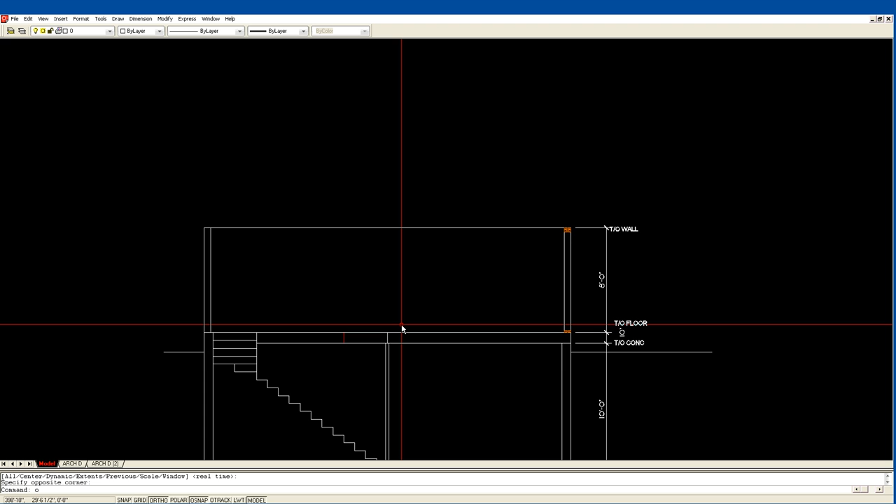We're just going to show a symbol for a beam, so if I offset something like 3 inches from the center again, and then offset something like 12 inches, I might be using 2x12s, or I might be using a 12-inch microlam beam, or I might be using less. We'll figure that out later.

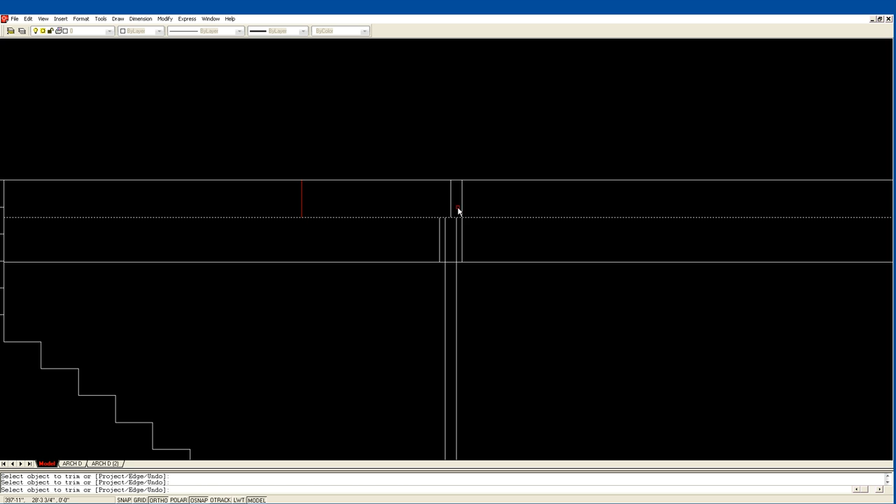Okay, and then I trim so that, and then I can show a symbol for a beam. So we can trim this. So there's a steel post with a beam running all the way 58 feet down the middle of the building, with joists coming from either side. That's how we're pretty much going to do that.

Now, this also could be a wall down here. We could pour another footing like this, down the middle of the wall and put an actual studded wall to support the center. And it depends on what he wants for his basement. That's a much cheaper way of doing it than buying teleposts and a heavy-duty beam like that.

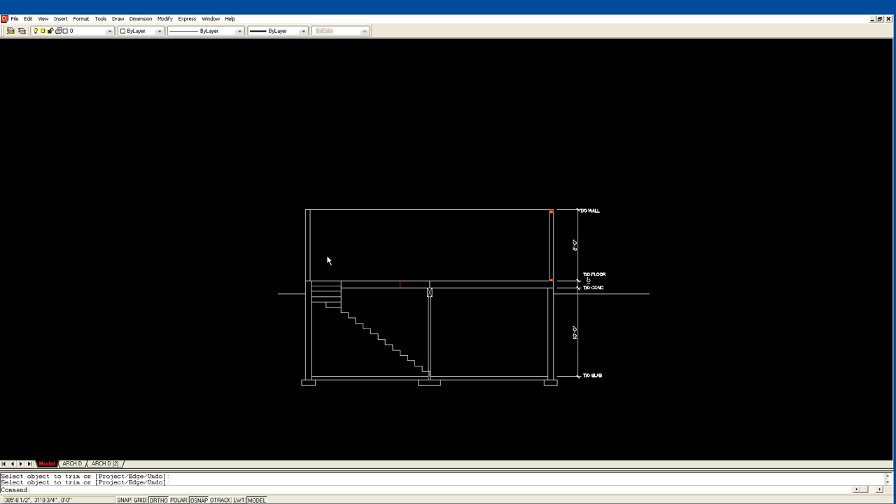Okay, the roof. Part of this building, if we go back to our floor plan here, this back half with the master bedroom and so on will be a flat ceiling, and the roof will be done pre-engineered, pre-made, delivered on a truck, trusses. We'll show something like that.

Whereas the front of this building, where he's got the view and the picture windows in the front and the rake windows in the front, will have a sloped ceiling, and so will be built out of rafters. Just to give you an idea, again, this is not a complete cross section. We'll design a roof with trusses. We've already established with the client that our pitch is 5/12.

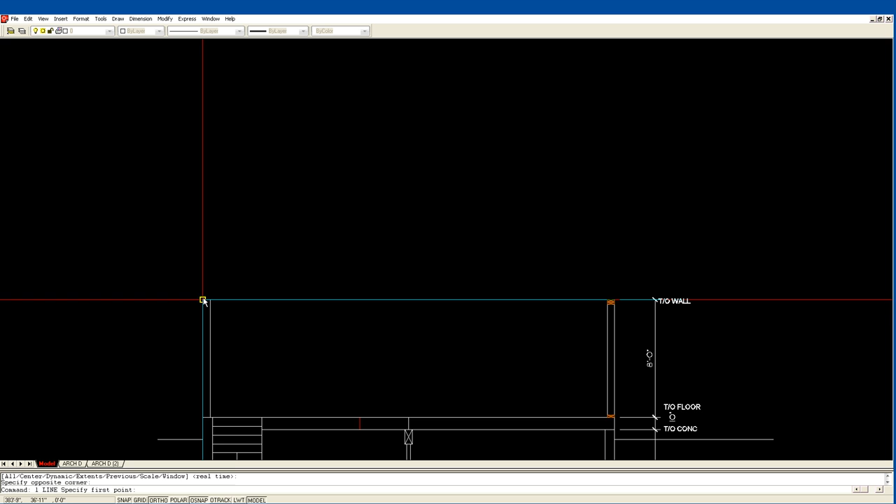Okay, no matter if you're using metric or imperial feet and inches, this roof rises 5 units for every 12 units in the X direction, horizontally. So I'm going to start with a line, pick the outside of this wall, and tell AutoCAD to go from that point at 12 in the X direction, comma, 5 in the Y direction. So there is a line at a 5-12 pitch.

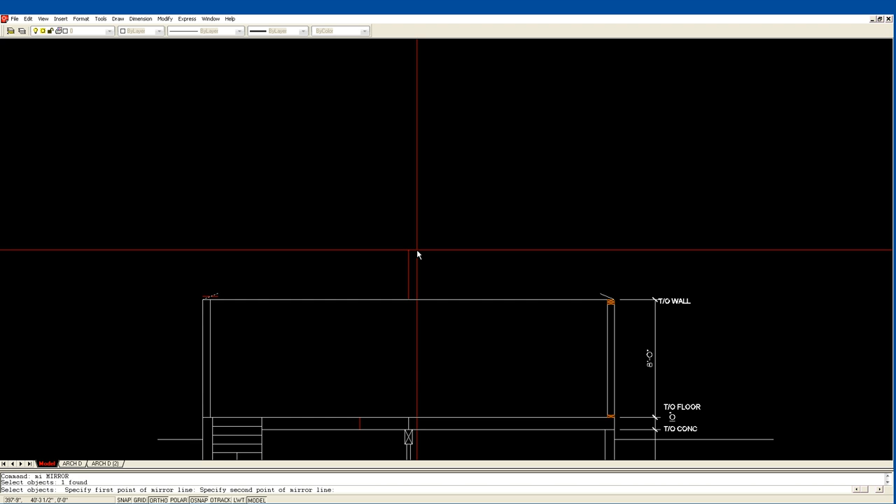I'm going to mirror this line to the other side of my building, and then fillet the two of them. So there's my roof.

At the back of the house, over the master bedroom, this ceiling will be flat, and at the front of the house, in the living room, the ceiling will match this 5-12 pitch. In order to do that, I have to use rafters, which are the same as floor joists, only at an angle.

Because I have to insulate this and leave an airspace, I need at least 14 inches of depth. So for this particular job I'm going to use the same material as I used for the floor - I trusses - and they're going to be 14 inches, so offset 14.

Actually, let's undo that and offset 14 in the other direction. Underneath that point, right at the center here, I'll need a beam and a post, just like I have here. It won't be a metal beam, it'll probably be a bunch of 2x6s nailed together, and it will sit right on top of this beam, supported all the way down through the basement.

Into this footing. So if I drew a line at center and offset 3 inches on either side to make a 6-inch post, and then I take a line from here and offset 12 again, not knowing what size this beam will be until we do the structural.

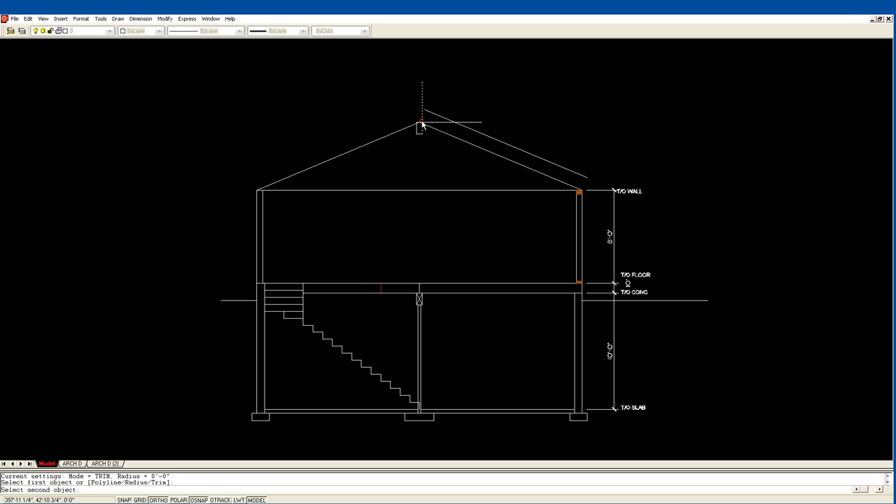Don't like that - fillet this one. Okay, so offset 14. I picked the wrong one and lost it. You see how that's going to work - I have a beam with a post underneath it, right on top of this beam, right on top of that post, right on top of that footing.

Now the other end, the master bedroom end, will be built out of trusses, and they are prefab. So I can get rid of this line. Typically a truss will be - I'm going to get rid of this post and stuff too, we don't need it for a truss.

It will look exactly like you see. It'll come on a truck looking exactly like this. It'll be 28 feet wide, built out of 2x4s in most cases. It's engineered at the manufacturer, so they designate what it's built out of.

Typically, when we're drawing a symbol for it, the first thing we have to do is leave about 5.5 inches at the heel of the trusses. So offset 5.5, and that's where the bottom of this truss will be.

So I'm just going to move this line to there. Typically it's going to be built out of 2x4s, so I'm going to offset 4 inches. I am going to use a 2-foot overhang on this building.

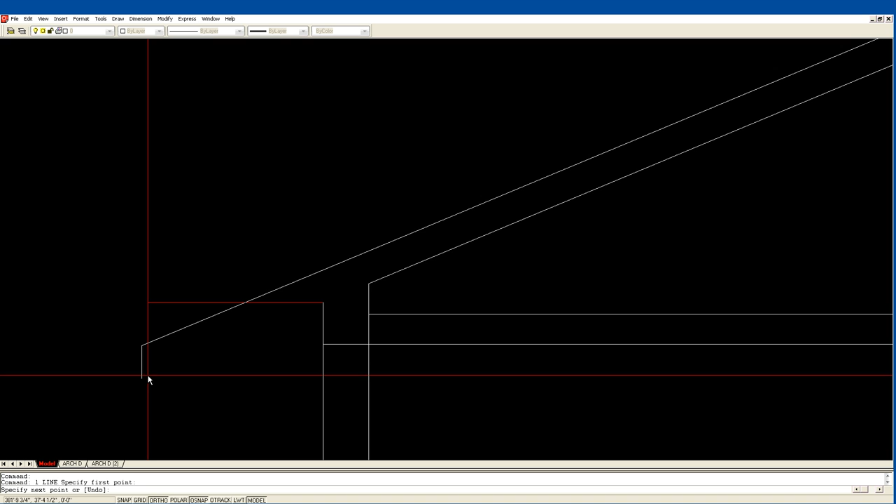We can trim, and we'll get rid of that, and that - oh, let's just put that one back. Trim this up. So that would be done at a manufacturer.

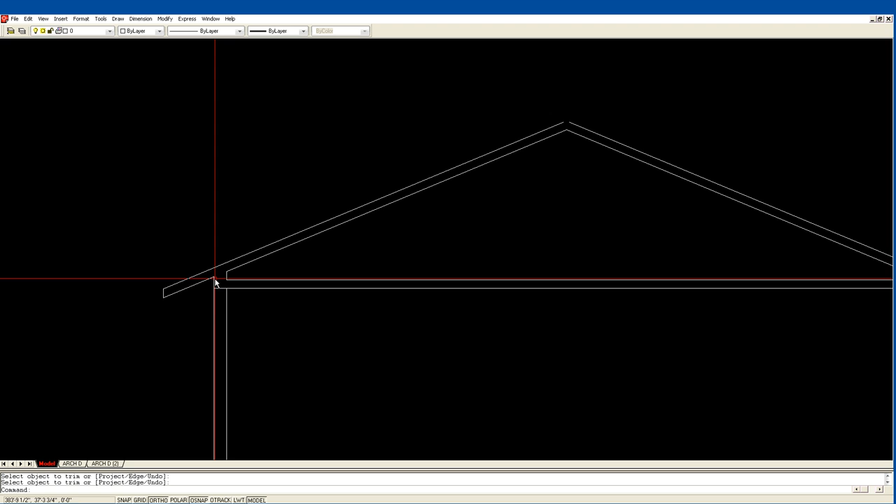That would be a 2x4, 2x4, whatever they use inside. It would be put together with gang plates - they're strips of metal with knockouts in them, and they're rolled onto these joints, and they make it very tight and very strong.

And we finish this up. Now there would be a chord in the middle, probably a chord in the middle here, and then another chord like that. So this whole truss system would be built out of 2x4s, and it would be designed to hold however much snow sits on top for whatever area you're in. So there's a snow load for every area, and these trusses will be engineered for that snow load.

So as we're designing this house, we just show the fact that they are trusses. We don't actually design the truss - that's the manufacturer will do that. Okay, that's about the roof. That's about as far as we need to go on the cross section.

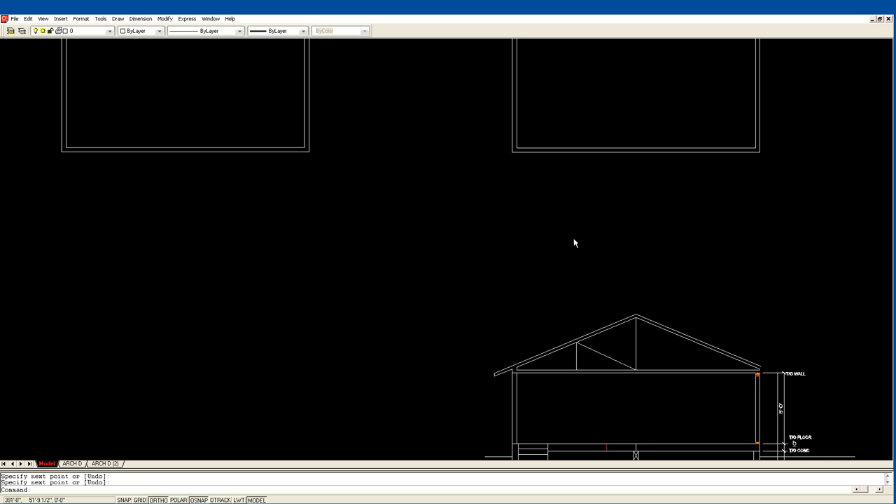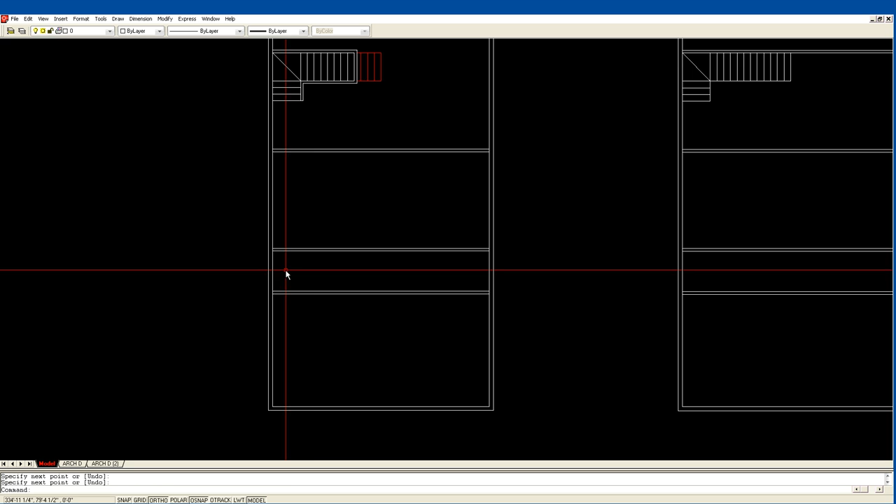Let's go back to designing the plan view here. I'm going to start in the bathroom, and if you look at the drawing that my client gave us, the sketch, he has a bathtub along this wall, a toilet beside it, and then a vanity. So we're going to bring those in.

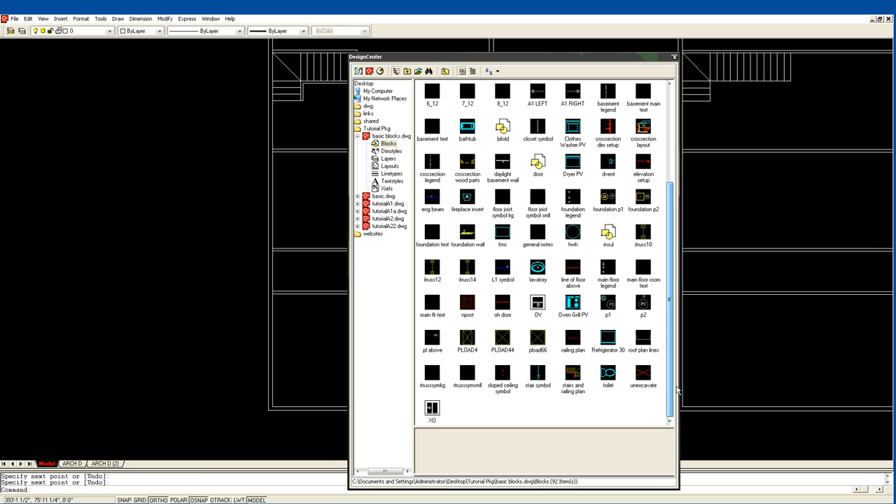Using AutoCAD Design Center with the basic blocks drawing I've given you, I double-clicked on blocks to get to the blocks within that drawing. I need a bathtub. Oh, there's a toilet, we need one of those. We need a sink, and we need an ordinary bathtub, a 5-foot bathtub.

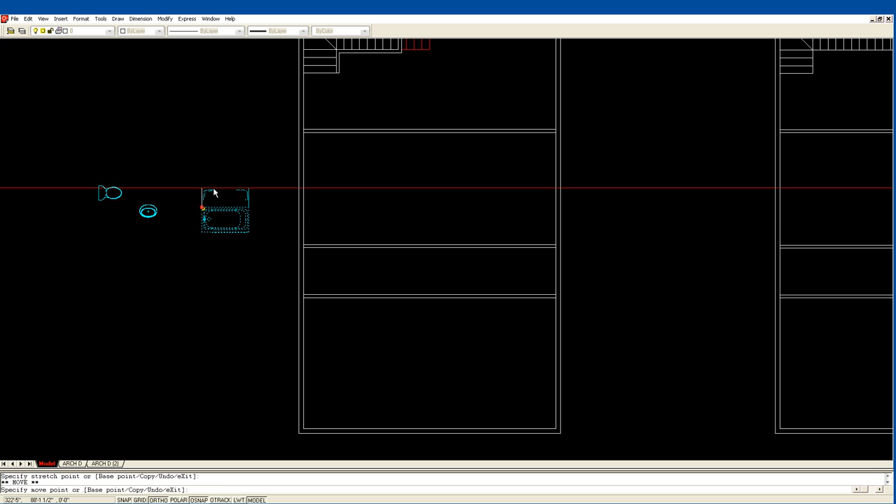I'm going to put Design Center away. So these came in as blocks. I'm working on layer 0, so in order for these blocks to go back onto the layer they're supposed to be on, I'd have to explode them. But I don't want to right now because they're easier to move as blocks. They only have the one node. I make that node live, double click twice to get into rotate, and move it in the direction I want, which is right there. Grab it and put it right there.

Okay, that's simple. Fits right into a 5-foot space.

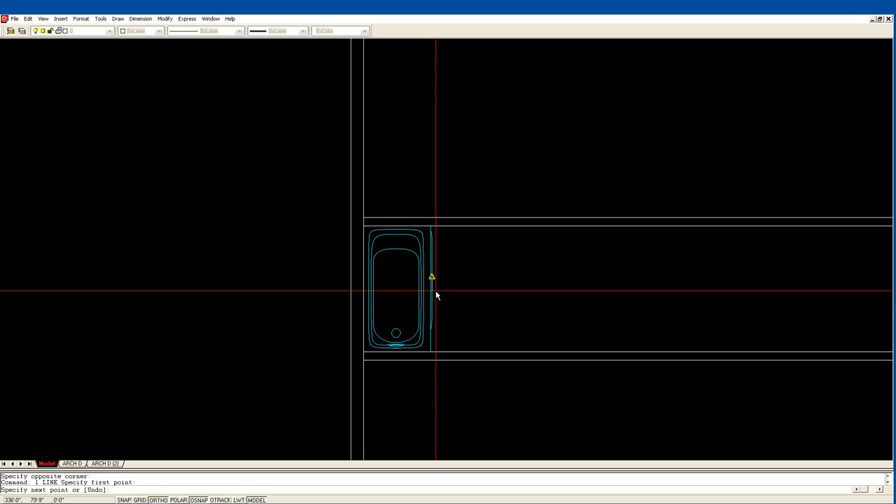I need to designate space for the toilet, and typically that would be 3 feet, okay, is what I want for a toilet. If I take a line somewhere from the center of that up, and offset 3 feet, extend it down, this is going to be the space I'm allotting for the toilet. I'm going to rotate the toilet, move the toilet, F8's off, anywhere within that space.

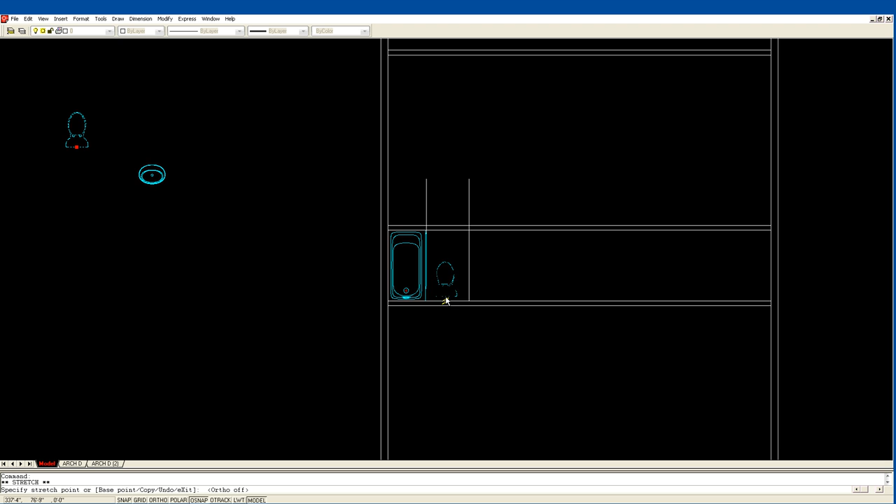I'm not building it to exact size. It really depends on what tub they buy, how wide that tub is. I've left lots of room here. No matter what tub they buy, it should fit in there nicely.

I now have to put a vanity in and then put the sink in the vanity. I'm just going to rotate the sink around, punch in 180. So we've turned it around 180 degrees. I'm going to make it live and just bring it in closer to where I want to work here.

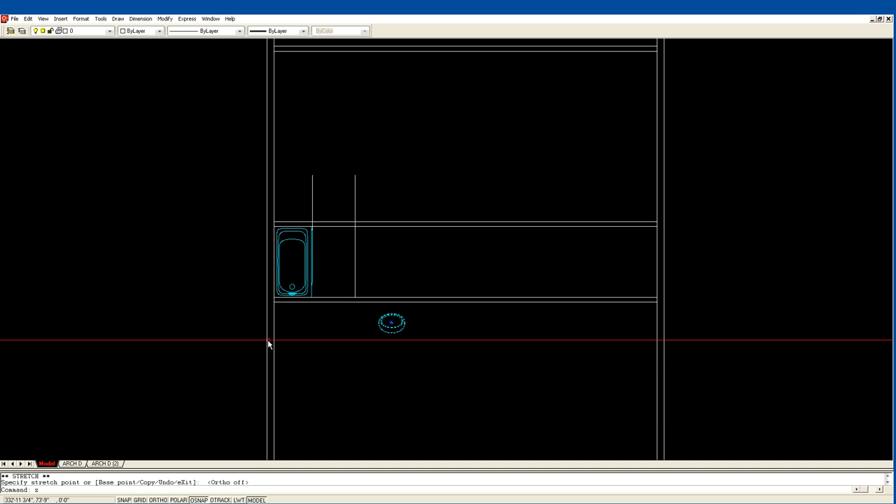What happened to my toilet? Oh man, everything went, I'm just going to undo. No, I'm going to rotate it around 180 - I guess it was live when I did the sink. I'm going to put it in here somewhere, and then zoom in and move it.

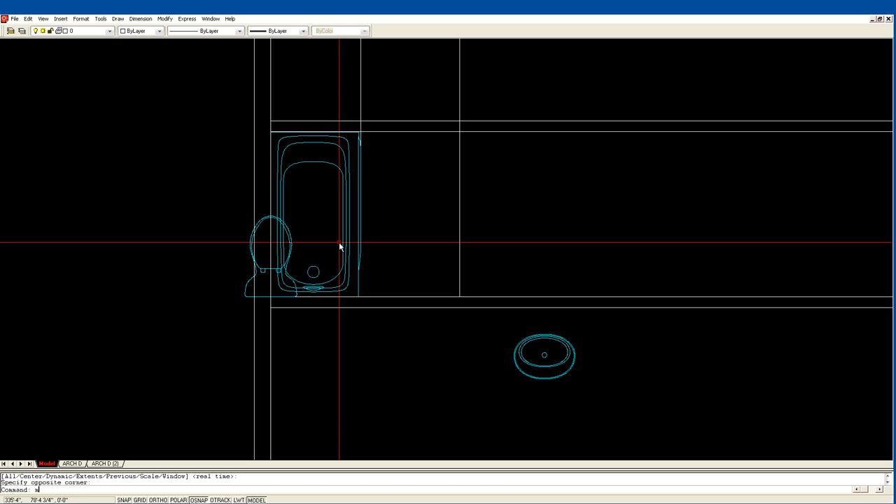I figure that vanity, a nice length for a single vanity, is about 4 feet. They're all over the place, so they're inexpensive to buy, and typically it's 22 inches deep. So I'm going to offset 4 feet, and offset 22 inches. And then I'm going to move my sink in there.

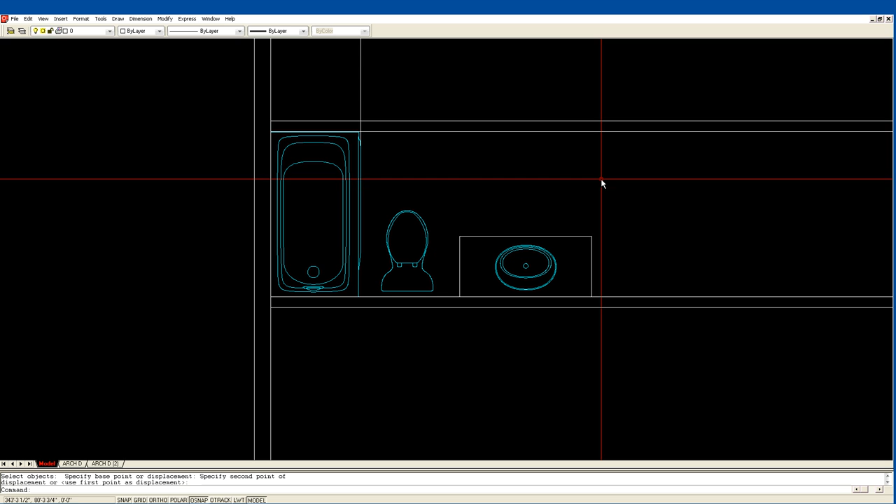So that's the layout of the bathroom. We can get rid of this construction line. I've left 3 feet, put a normal bathtub in 5 feet. I'm going to extend this to here, and then offset 4 inches. That's going to be the outside wall of my bathroom. I'm going to fillet it.

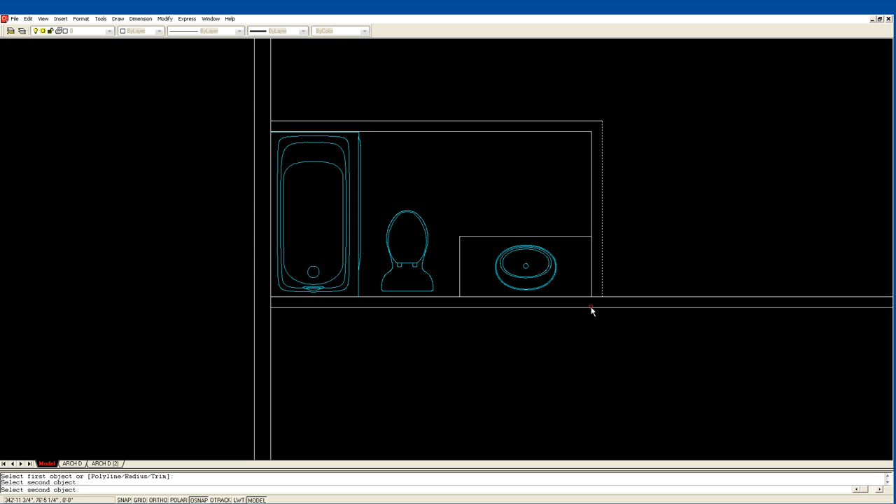I need to put a door in this bathroom, so I'm going to use the door lisp routine that we've put in Appload. You get into it by typing in door. The first thing it's asking is for an offset point, so I'm just going to pick the inside. I picked that inside corner because this lisp routine wants you to pick in the direction of the swing, and I want to swing this door in against that other wall, so I picked the inside of the wall.

It's asking me for an offset point, and I'm going to accept 4 inches, which is the minimum that a framer needs to put in a door. He needs double studs on either side of that door, plus the door opening needs to be 2 inches bigger than the actual size of the door, so 4 inches is 2 studs, 3 plus an inch. That works perfectly, so I'll accept 4.

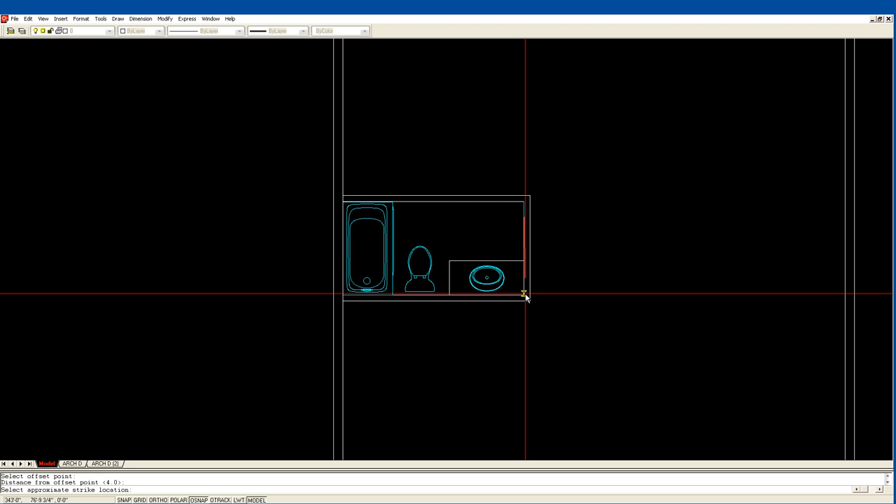Approximate strike location - well, where does that door end? It's approximately here. Now if I were to pull it way out to here, I would end up with a double door, this lisp routine would just draw a double door. So again I'm going to pick somewhere around here. It's asking me for the opposite direction, the opposite face or wall, so I'll pick that. It's asking for the size of the door - well, a typical door for a bedroom bathroom would be 30 inches. 30, enter. There's my door.

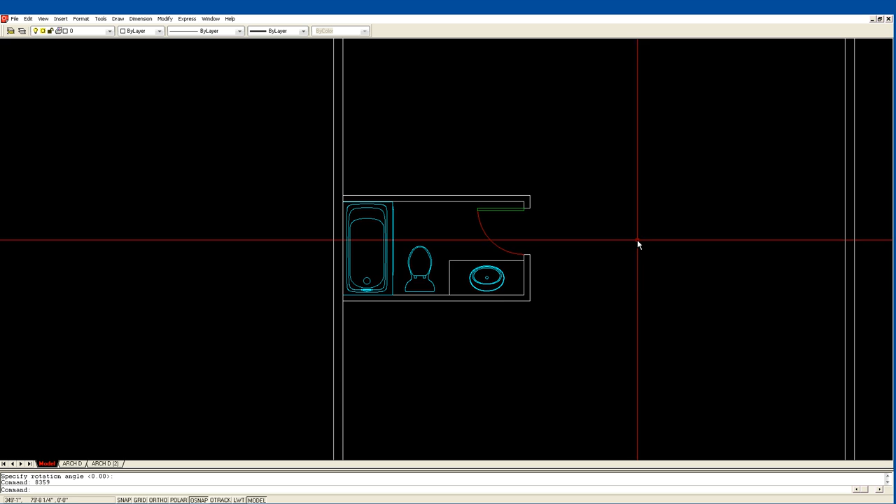Okay. We need a glass of water is what we need.

Hallway. We made his stairs 42 inches wide, so we'll make his hallway 42 inches wide. So offset 42, offset 4, there's the hallway.

These lines extend. Trim.

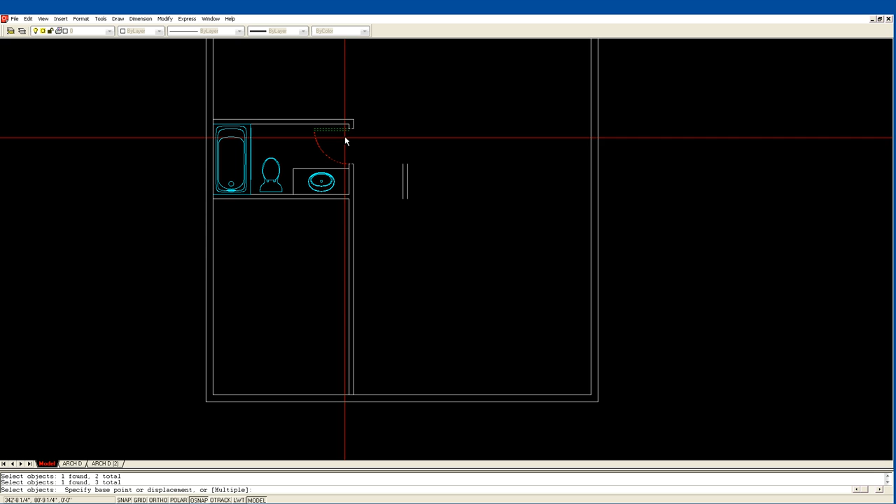Okay, we need to put another door in. We're just going to steal this one. So we're going to copy that plus that from right in that corner, and we're going to put it right in that corner. Then we're going to trim that and that. Okay.

Offset 4 inches for that minimum framing. Okay, that's where we can start this return wall over to the outside. So extend. Okay, then we're going to offset 4 inches, and then we're going to trim everything up. Okay. That pretty much looks like his drawing. We're going to extend this hallway right to here and trim it up.

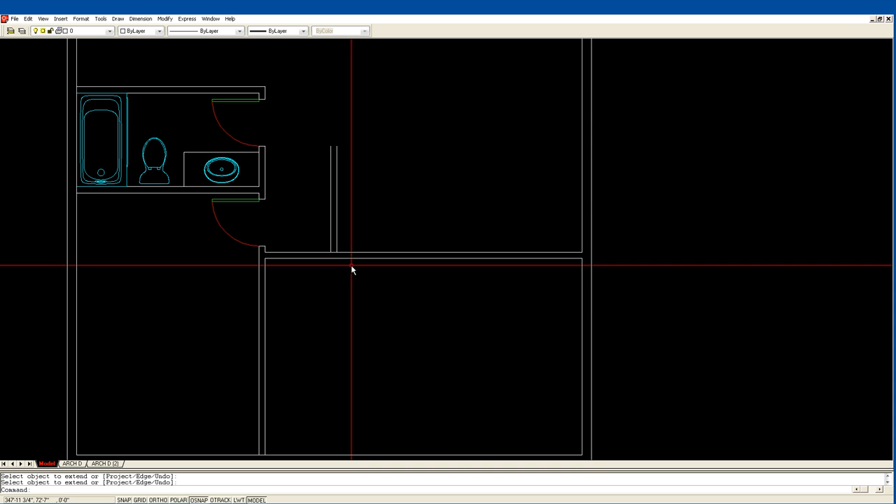Okay. Now he shows a vanity along this outside wall here where my crosshairs are, and it has 2 sinks in it. So a really nice size for that would be 8 feet. 4 feet for a single, 8 feet for a double. So we're going to offset 22 for the width of our vanity, and then we're going to offset 8 feet for the length of our vanity. Okay, offset 4 inches for that wall and trim it up. Okay, so there's our vanity.

Now, to show a door going into this back part of the bathroom, and that's what I'm going to do. I'm going to do my 4-inch minimums. Okay, so offset 4. Offset, I'd like a 30-inch door in here, so 30. Okay, so that's going to be my door space. Okay, and I'm going to trim.

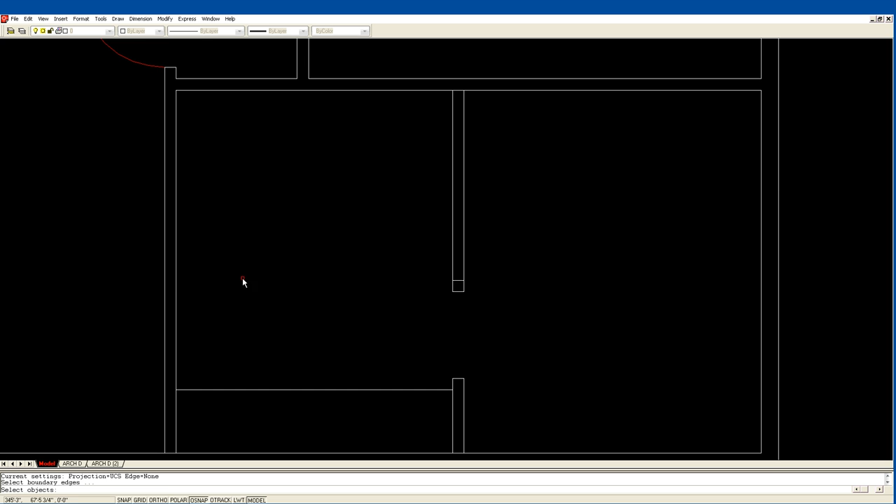Okay, offset another 4. Okay, oops, zoom in a little bit. Okay, now offset 4. Okay, that's going to be where my wall is for the walk-in closet. Okay, so offset 4 for the wall. Okay, there we go. Trim. I like to trim as I go.

Okay, the closets: for a closet that you're going to hang things in, coat hanger, which is what this will be, this walk-in closet, a typical shelf over top would be 16 inches. Okay, so we'll offset 16. Okay, all the way around. We'll put shelves and coat hangers all the way around. We'll fillet these. Okay, we'll trim here.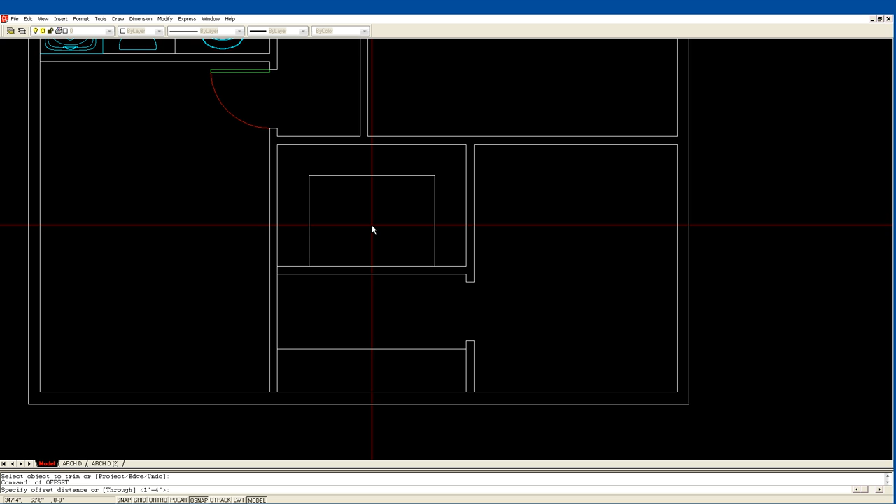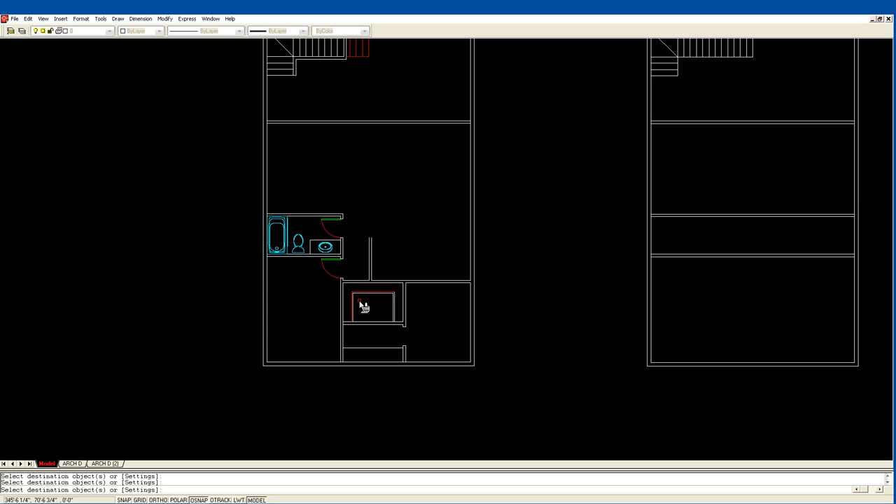Okay, now if I offset 2 inches, okay, and fillet those, that would show the position of my coat hangers. And because they're underneath and you don't really see them, okay, this is basically a symbol. Okay, we're just going to put those on the hidden layer, which is going to make them a dotted line. Okay.

I'm going to explode this guy, and so now when I click on any one of these lines, you can see it's on the utility layer. Okay, I'm going to use that. I'm going to match properties, MP, and I'm going to put all of these, whoops, if I can get on them, onto the utility layer.

Okay, I have to get into this walk-in closet, and they're showing a swing door, and they're actually showing it into the space. And I'm not sure I like that. Every time you went into that closet, you'd be hitting somebody that's using the vanity.

Let's copy this one. Okay, I want to multiple copy it. The newer programs will just do that right off the bat. Okay, and I'll show the plumber. There's 2. Okay. Okay. So there'll be people standing here washing their face.

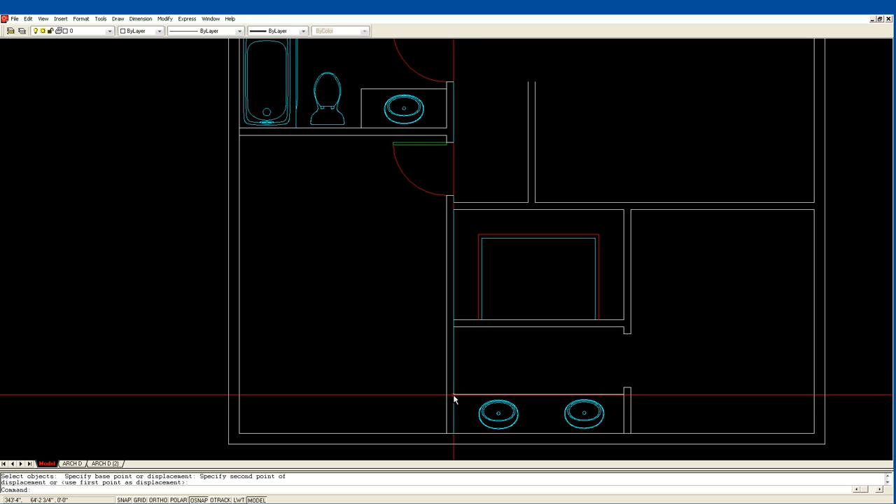There's actually not a wall here. This is going to be just an opening. So I'm just going to offset 4 inches and 4 inches and extend and trim. Okay, and maybe clean it up a little bit more.

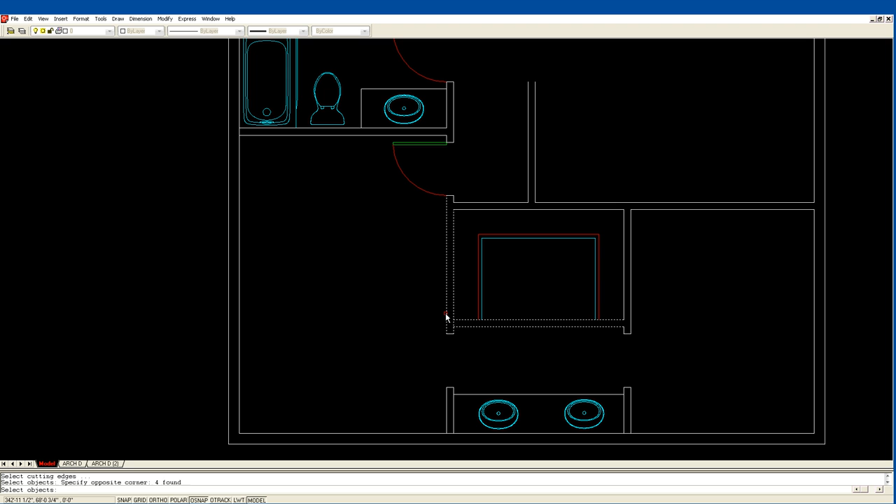Okay, here I'll have a door going into that area, and the drawing shows me. Actually, I have a closet in here. Let's do that. Okay, so offset. A closet that you're going to hang things in needs to be 24 inches deep minimum. Okay, so again, you have this 16-inch shelf and this closet rod, and so 25 inches to account for drywall, half an inch on the other side would give you 24 finished opening. And so that's what we're going to do here.

We're going to offset. We already are in offset, and we'll go 25. Ooh, offset 4. Okay, well, we're not going to make it there. The other thing is I need 36 inches for my toilet, so I'm going to offset 36 for this area in here. Okay, so that'll be my toilet space, offset 4. Okay, this will be my closet. You can see we're running into problems with that door.

Okay, well, I'm going to stretch, and I'm going to take it back, turn F8 on, about a foot. Okay, and then I'm going to offset 30. Okay, so that'll be my new position for that door. Okay, I can erase this, and I can trim.